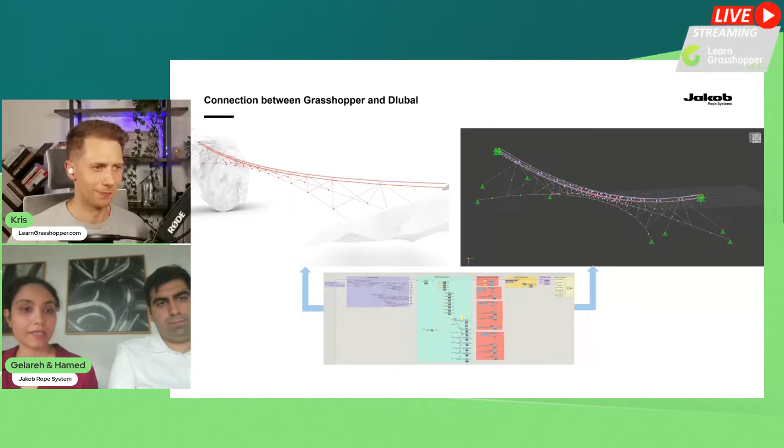About the company we work in, as you mentioned, it's called Jakob Rope, and it's located in a beautiful area close to Bern. The manufacturing company is located in Saigon in Vietnam. And Jakob Rope's expertise is in manufacturing ropes and webnet.

About myself, I got my bachelor's degree in architecture from Iran, and then I got my master's degree in iTech from University of Stuttgart in Germany. I joined Jakob since 2022, and my responsibilities now include doing computational design and developing parametric workflows for the projects that really add value. Also recently, I have been focusing on doing life cycle assessment and environmental product declarations to get certificates for Jakob's products.

We work on different projects, mainly developing parametric workflows. With this parametric workflow, we can automatically change the geometry to meet the structural needs and also to meet customers' wishes. This workflow also helps us create super detailed models very fast that can change according to any upcoming changes, so it has really made our work more efficient.

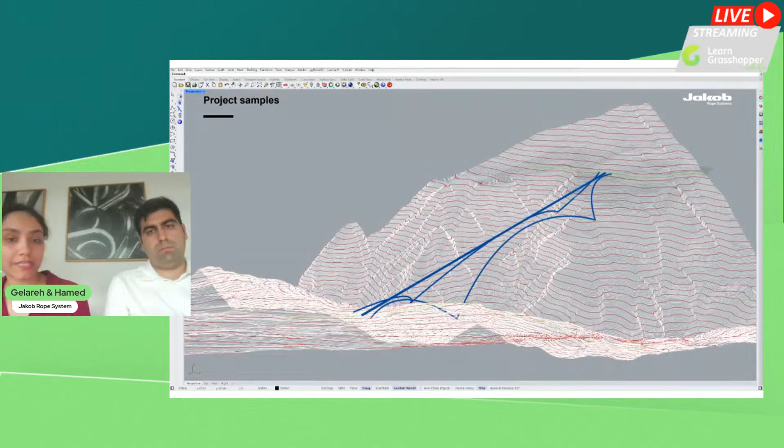When I say developing the workflow, it's not just about the geometry itself. At the earlier stage of design, it can help us locate the appropriate position of the structure. For example, given this length and span, where should we locate it so that the wind cables and foundations have the least distance from the topography. So at the earliest stage of design, it can also help make your work better and more efficient.

I'd like to add one more thing to the previous slide. It's really cool that you involved Grasshopper so early on, not just for the final design, but even for finding the best way to go with the bridge. Have you used any software to optimize the position of the bridge? Because I saw these colorful lines - if you can explain what they mean on the screen?

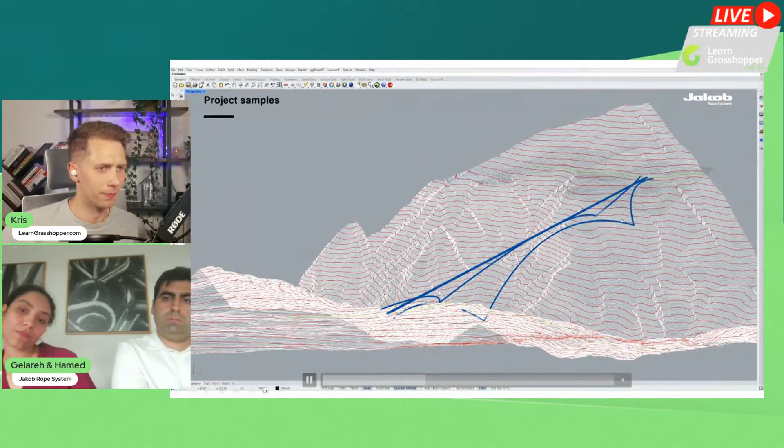For this one, we didn't use any optimization process. It was a simple calculation - we knew the distance and length of the bridge, and we knew at which elevation we should put the structure. But as you can see when I play it, there's a wide range of options for where you can decide to put the bridge. So we took the distances from the lower points of our wind cables, which were the position of the abutments and foundations, to minimize the distance. We had a range of numbers from which we could select the best position. This range shows it getting greener where you need less excavation to put the cables and locate the abutment.

Really great, and as you said, it's not necessary to use complex optimization - you can just make it simple, and for sure it works great. Okay, thank you. Of course.

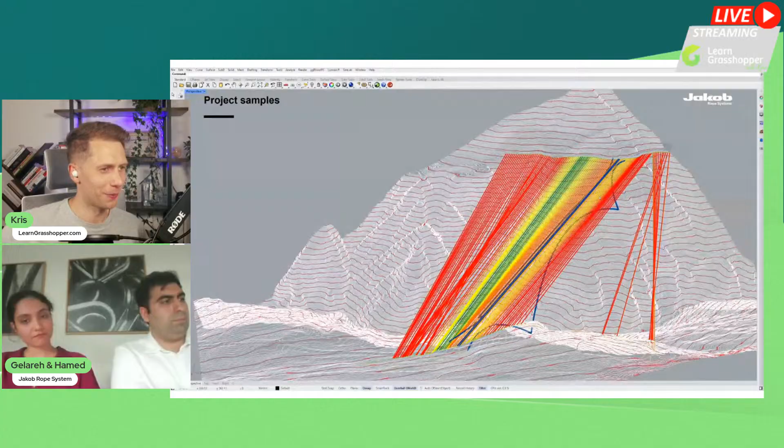Hello everyone, I'm Hamed. I also got my bachelor degree in architecture from Iran, and later studied ITech at the University of Stuttgart. I joined Jakob in 2023, and my work mainly focused on developing parametric tools and automation in the design and fabrication process. I also developed tools for repetitive and time-consuming processes for in-house use to make tasks more efficient.

In this project, we also developed a workflow that uses the webnet as an active structural element. This workflow enables us to position the bridge in any given topography and generate system lines, structural analysis, and get a bill of quantity, production plan, or any other documentation needed instantly. To demonstrate this workflow, it was used in designing a suspended bridge in Chur, Switzerland. I have to mention that this Friday we are going for the opening of this bridge to see it in person.

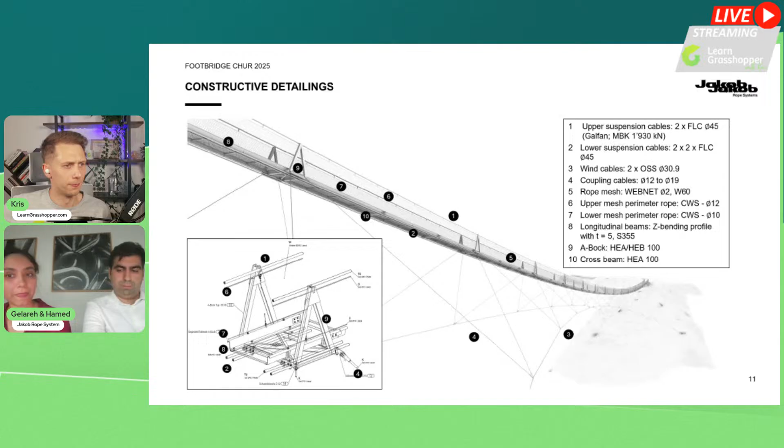Because it's really a beautiful bridge, and we visited it in winter, I would like to show a video of the bridge so you can get a better view of it. The surroundings are just amazing, so it's so beautiful to design bridges in this area.

So what software have you been using? You said Grasshopper and Dlubal for calculation, and what else? We also use Inventor for detailed design. Yeah, in the company, people also use Inventor for detailing.

And we can see on the screen the preloading, tested with the calculations. So for those who never seen bridge design, in most cases you have to test it out. Here, they've been using water tanks to test if the response of the bridge is similar with the calculation. And this looks amazing with these waterfalls going from the bridge.

I will move to the next slide.

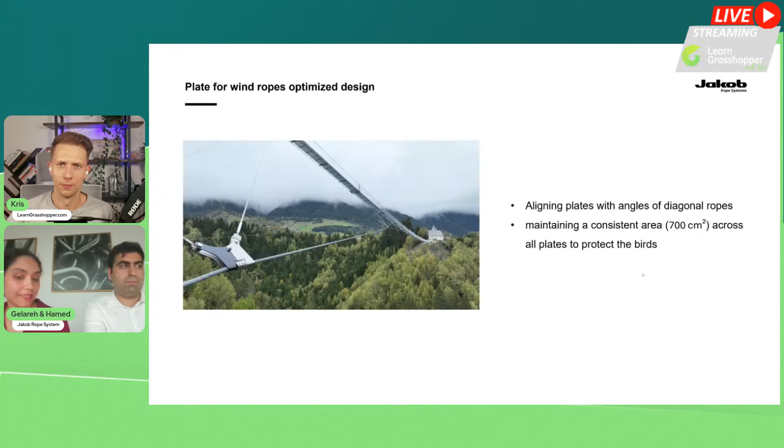And this is how we approached it. We explored a wide range of design options with different fillet sizes and different directions, but we chose the ones that could meet this criteria of consistent area and also be aligned with the cables. Because each cable at the intersection has its own different angle.

So every single plate was different, right? Every single one. There was no scenario where plates were similar, no—just because the bridge is mirrored. Of course, the ones which are mirrored are similar.

To tell about the workflow of this project, the model is generated using Rhino and Grasshopper, and structural features are assigned to the geometry, like the section and the material. This can also be defined in Dlubal, of course.

Then the generated model is taken to Dlubal software, it's analyzed, and the optimized result is brought back to Grasshopper. Rhino and Grasshopper also help to do super high-level details—the basic geometry was used by the steel supplier for creating 3D models applicable for construction.

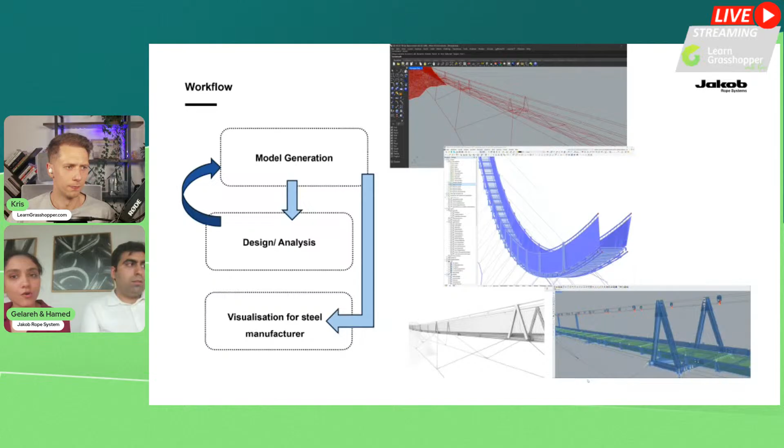And now I will hand over to Hamed to open the script. Yeah, so now we will go to the live presentation, so we will see the Grasshopper in action. Hope nothing will crash.

I also hope so. But I wanted to start with a very simple example to show how we can define the geometry itself, then assign the structural property to our geometry, how we can export this structure to Dlubal, run the simulation, and bring the result back again to Grasshopper. So we'll have the full loop in Grasshopper in case you want to run any optimization processes or other uses. After that, Gelareh will

show you the Grasshopper file for the actual bridge, because that one is a little bit big. So we'll just start by learning with a simple truss. But before that, I also want to mention that we are able to import a structure with all the structural properties into Grasshopper. We can simply use the RFEM 6 import component and run these components. Of course, I also have the model opened in my RFEM, so they can make a connection.

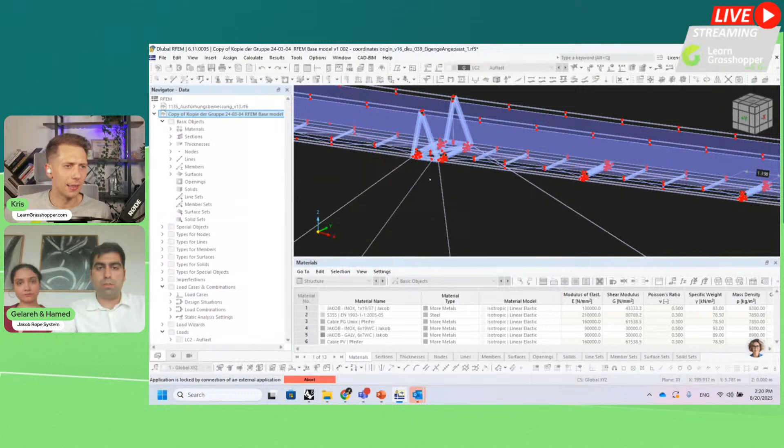It uses a web server to send and receive data between these two softwares, acting as a bridge. Our model is a little bit big, so it takes time to import everything. Is the link between Dlubal and Grasshopper available for free? Yes—in RFEM 6 it comes with the Dlubal licenses. In RFEM 5 it was a separate license.

So actually, you don't have to model everything from scratch. You can also import into Grasshopper a model already built manually in Dlubal, and then make all the modifications, right?

Exactly. I'll mention it later in the Grasshopper file, but for some options, like design situation or load cases, we're not changing them every time we want to run the simulation. So we can define these properties once, save it as a template, and reuse it again—assigning this property to our load members again and again, just defining it once in Dlubal.

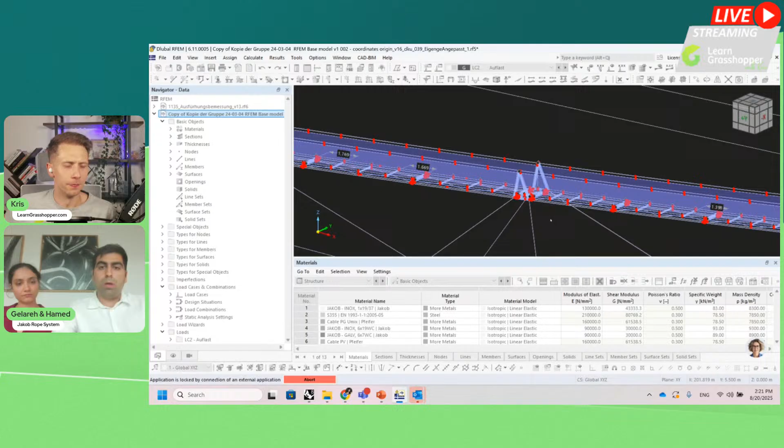Everything is modeled as beam elements here. We also have some cables, so basically it's a model with cables and beams.

I can show you the model a bit while it takes time to import. And here you can also see on the bottom it's talking to the Grasshopper client.

Maybe you can tell a little bit what elements were created with Grasshopper and what's been created with just Dlubal. Actually, in this model, everything is modeled in Grasshopper, created geometrically, but for the design situation, load cases, load combinations, these properties were defined in Dlubal.

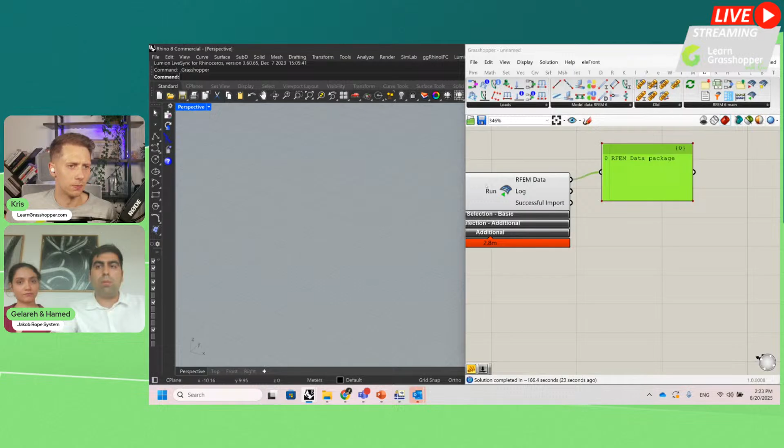Now we imported our model, but it's like a data package, so we cannot do anything with it. We need to somehow deconstruct it, split it down to the different elements, so we can use the component called data component.

For example, for the material, we can use the material component from Grasshopper, but here we should change the mode of the component from assembly to extract. So here we can see the name of the material we used in our previous model. We can also see the index of those materials and any other options they have. Or for example, I can also import the members.

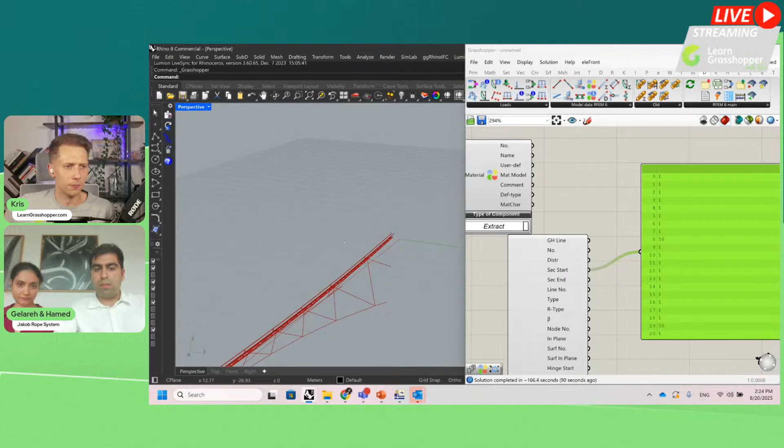So we can see the cross section. Of course, we also need, these are the index of the cross section we defined before, but we can see them here, and these are the Grasshopper lines we have.

Actually, you can extract all the information about materials and cross-sections from the active window. We have to have the window active from Dlubal, and the link is just created as you drop one component, and then you can extract one by one.

Exactly. And if you just need to import a specific property, like just the material, and your Dlubal model is huge like this one, and you don't want to wait several minutes to import or export the whole model, you can filter your information here.

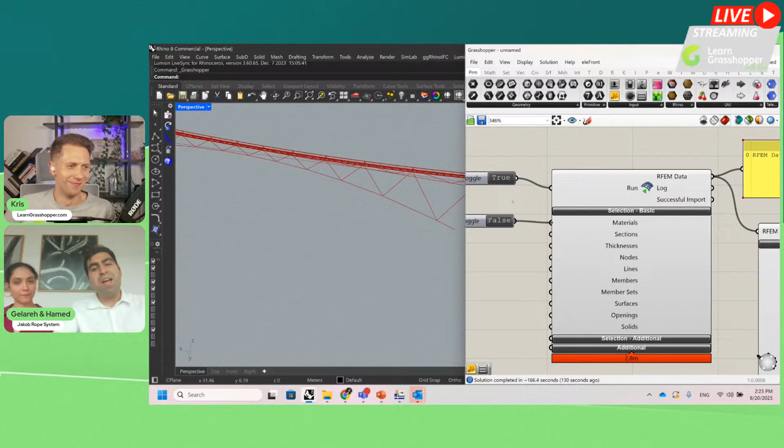For example, I can make this one true, so it will only import the material for myself, from Dlubal. So you can limit what you select and filter it out.

Exactly, yes. So let's start with our simple truss. I can start with a simple horizontal line, and give it a length, for instance, 10 meters.

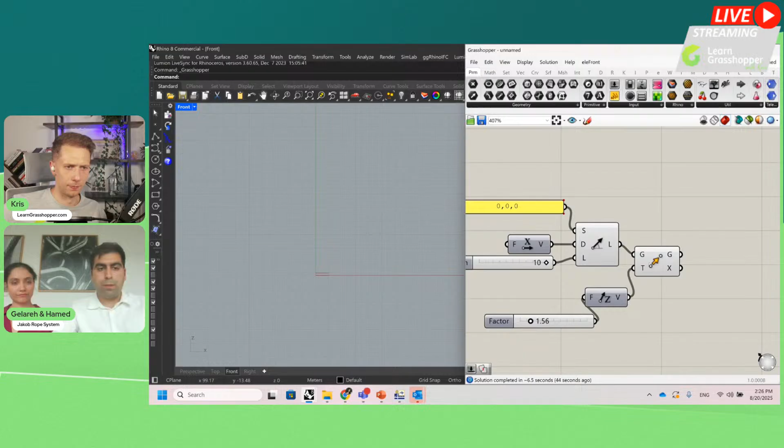I can move this line in the Z direction, I don't know, 1.5 something in the Z direction, to create the upper part of my truss.

I can also divide these two lines to be able to draw the diagonal and vertical elements. So now, first of all, I need to draw my horizontal lines in a bridge. I prefer, although I have a single line for this horizontal line, to make it like a polyline, so segmented.

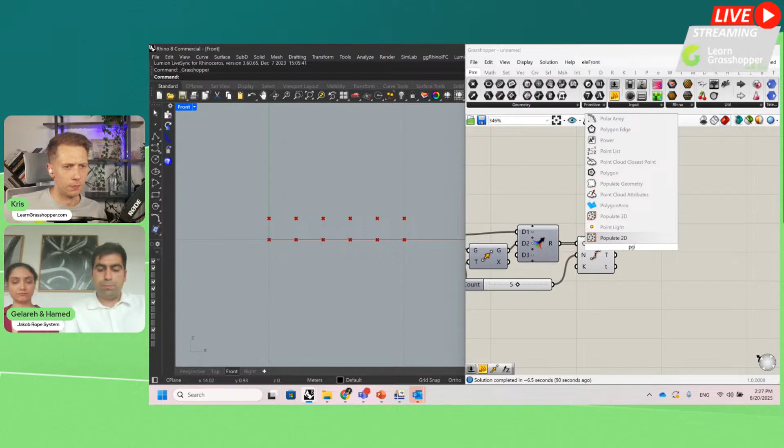Sometimes at this intersection point, Dlubal automatically detects the intersection and adds a point on it, but sometimes it misses this intersection point, and structurally our structure is not connected. So it's better to create it from scratch as a separated segmented line.

So I can create a polyline out of it. I can also flip my data to be able to have the vertical ones.

For the diagonal ones, I can remove these points on top and bottom one after each other. So here I can just keep this one, but I also need - okay, so for the top line and for the bottom line I will keep this, and for the top line I can change the pattern.

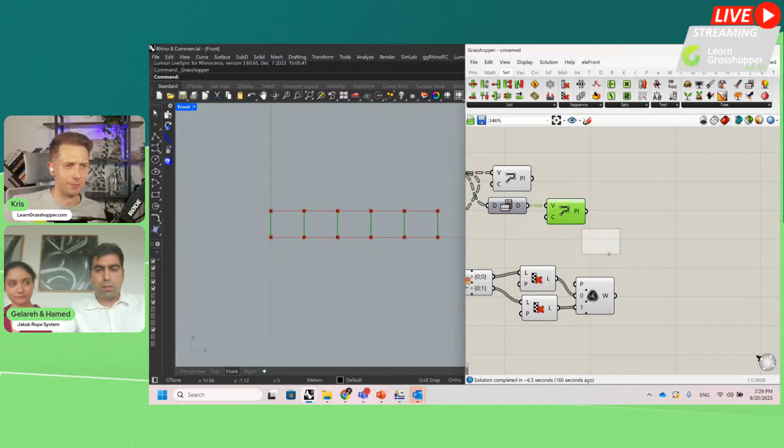And we can merge these two lists together and create the diagonal lines.

It's also much better, advisable, if we explode these polylines into segments. So we can explode them and also flatten all the output geometry.

Okay, so now we have everything we want. We also need to create our structural elements with different cross sections as a separate container.

So I prefer to use Telepathy. It helps me a lot to organize the data here. I can also recommend Telepathy, it's a really great plugin to define variables and avoid making that much mess in the script.

Exactly, and you will see in a model like this decent bridge model, which is huge, you cannot really keep track of data without having a tool like this.

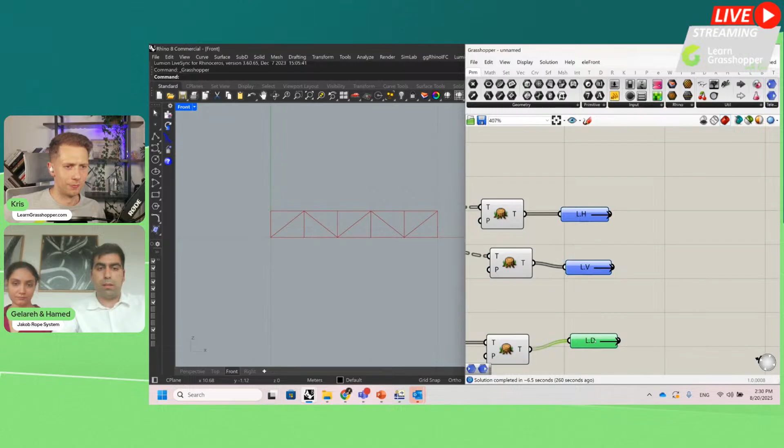So I will add this L for having my lines, and then the name of the lines after that - horizontal lines, vertical lines, and diagonals. So now I have all the geometry I needed.

I also need the two points for my support points, for the supports. Create them and add them here.

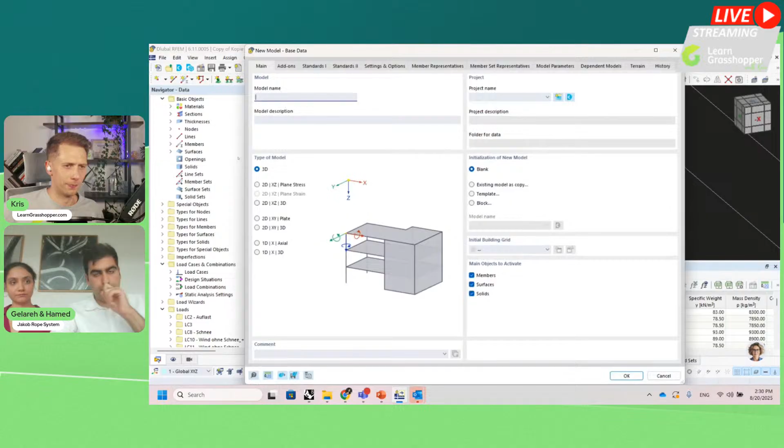Now we can start creating the model, or all the properties we need for Dlubal to work properly. So I can create a new file, name it test, for instance. Okay, so in Data Navigator parts, we can see what type of properties we have in our Dlubal model, and we can use this list also as a checklist to define everything based on this.

So we'll start with the material. For each object in Dlubal, we need a specific index. So I can give this index manually, as we only have probably one material. We also need a name of the material, and this name should match exactly the material we have in the Dlubal library. So we have 2 ways to get this exact name from Dlubal.

Either we can create a new material and search the name from this list, or we can also go to the CAD/BIM tab and open the conversion table. Here we are also able to search for the material. But one point I forgot to tell: before doing that, we have to go to program options. We need to turn on some options first. For communicating between Grasshopper and Dlubal, we have to check the web server, to be able to bridge the data between the two software.

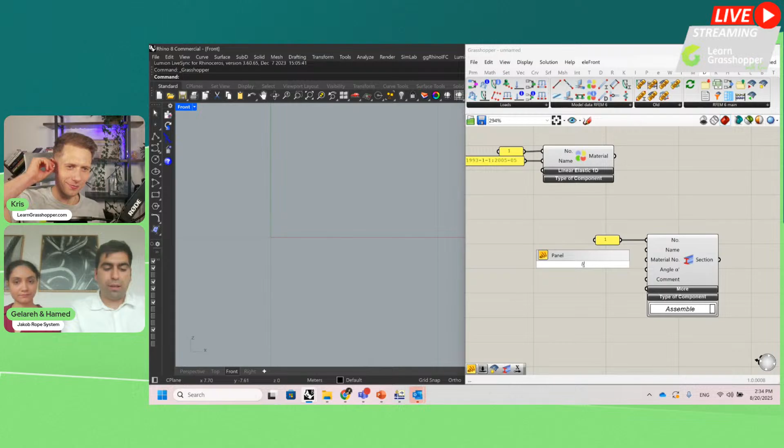And for the name, I can just give it a cross section, any cross section. It can be hard for Grasshopper users to start counting from 1. If your whole life you've been counting from 0, now you have to change again.

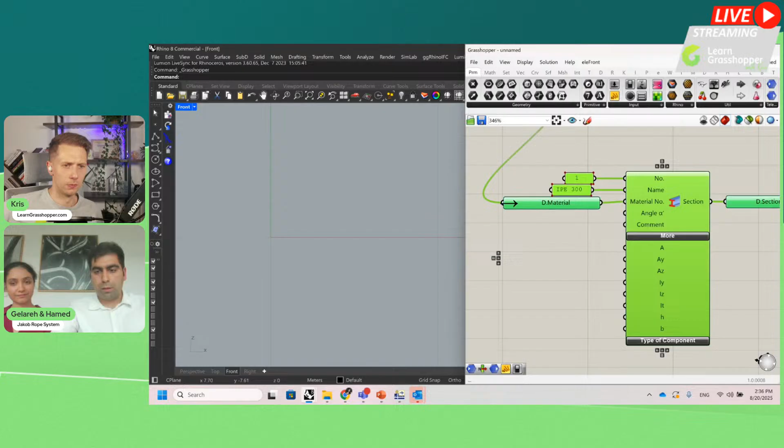And again, to keep the data structure also in the Dlubal section, we name this data Dlubal.material. And I can change this name to section 1. So I have this cross section created. Of course, we have all the options as we have in the Dlubal software. These are optional properties. If you want to define them, we can define them here, or otherwise just take the default values from Dlubal.

For the next one, we can also change these. We can use a different cross section for the other type of members that we have, and I can give it another name. So now we have defined the material and the cross section. We are ready to define our first member.

We need a Grasshopper line, so I can take this receiver just by right-clicking on this telepathy key. I have all the lines here. So I need my horizontal lines for these. I need to give each line a specific index, so I can get the length of this list. It's not given automatically? You have to always give it?

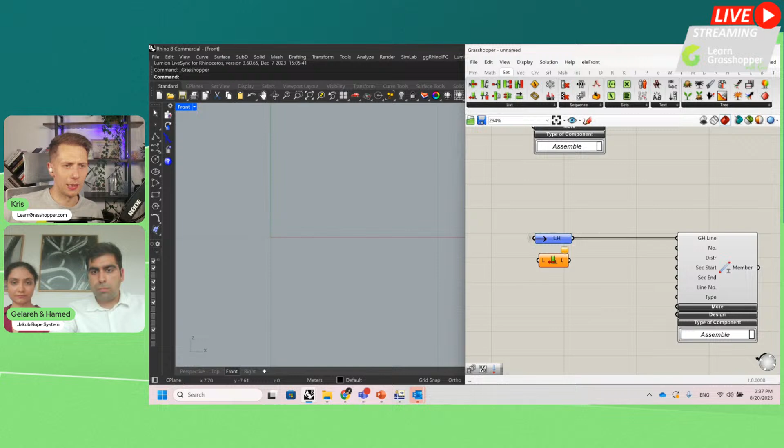Well, if we only have one member component, then it will get it automatically. But if you have several member components, and later on we want to use these members to define also our load members, it's much better to define it ourselves and have control on everything. Yeah. So you can use a series, and the important point is to start from 1. So we have our first lines.

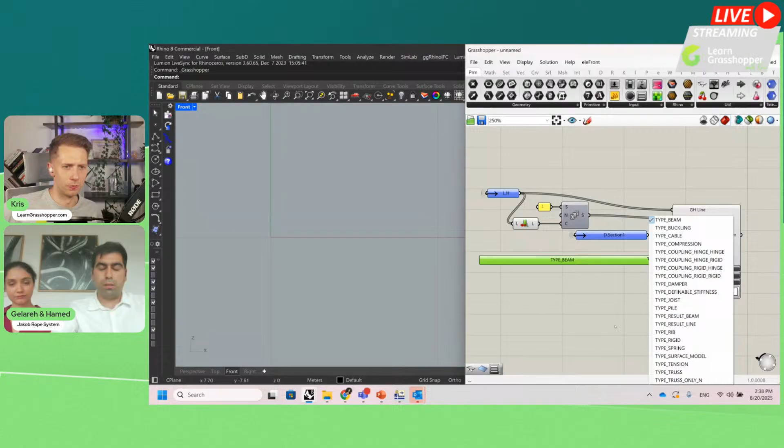We also need the cross section. Sorry. So Dlubal cross section 1. And the type of member we can also define, just by connecting a value list to this component here. Oh, nice. So it's automatically finding information from Dlubal. It will bring all the options that we have in Dlubal here. And set it as a beam. Okay.

It for the first one. For the second one, I can use the horizontal, the vertical elements. And for instance, I can also bring the diagonal ones. I can merge these two members together.

And again, we need a list. So how many lines do we have? And also we need the last index we used in the previous component, so the numbers are not overlapping. So we can get the last item that we used here, +1, because we're gonna start from one more, and in this component we can start it from the next index.

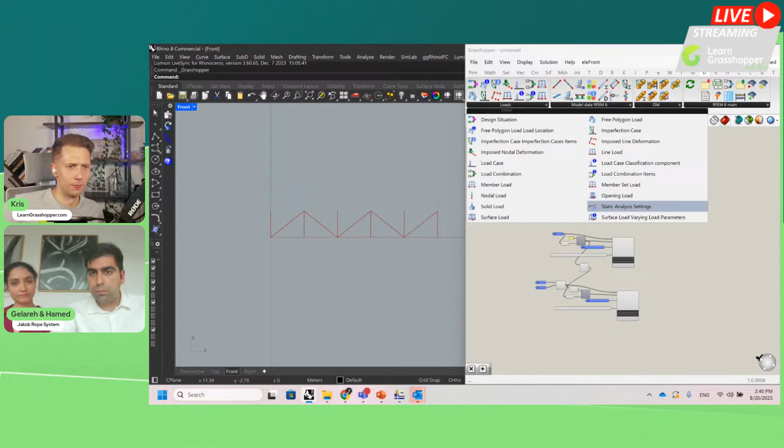And also, for this one, I want to use a different cross section, so I can just change my cross section to 2. So I will take the cross section from the second cross section component, and now we can create our support. So again, I need my lines. Or just the points. What do you need? Just the points for support? Yeah, exactly. These 2 points that I used.

Because I only have one component for defining the support, I can define it by myself, or it will automatically define it by itself. But I have to define the type of the support. So if it's rigid, I can use infinite, and 0 or any number between these two, if you have any specific number for it. So you can also define the support.

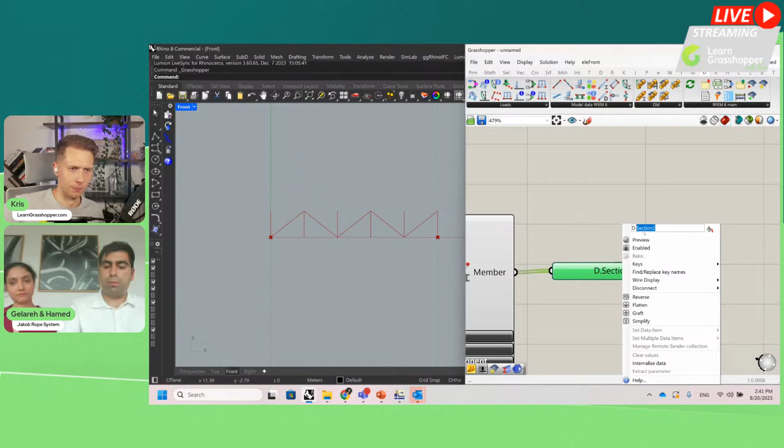I forgot to also create the data container for my members. One and member 2 and also, okay. So now we have defined our supports, we have defined our members. We can move forward and define our design situation, because I want to export everything from Grasshopper, and I'm going to run it also from Grasshopper, so I have to define everything here by myself. But as I said, we can just define these properties in Dlubal and just give it the index, and it also works perfectly.

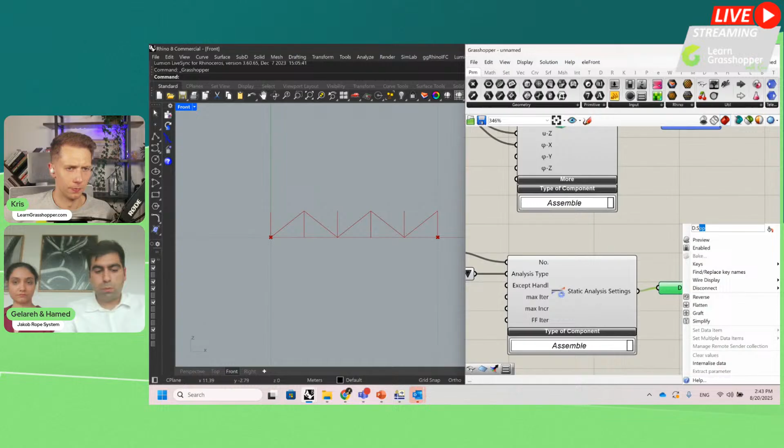So again, index and a value list for the design situation type. And we also have to export it. We can give it a name like this. Okay. What else? Now I can define my load cases.

So the loads, as a dead load or other loads, can you also define them in Grasshopper, like points or lines, or how to get the dead loads of the weight of the elements? Yeah. Of course, this is not my first expertise. I just asked this information mainly from the structural engineers.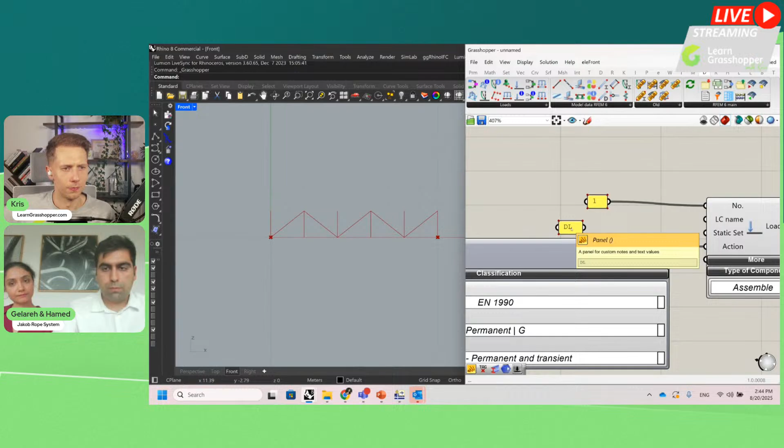But so we can use the action category. We need the index, and we also need a name. Should be enough. And for the static analysis, we can also take it from here.

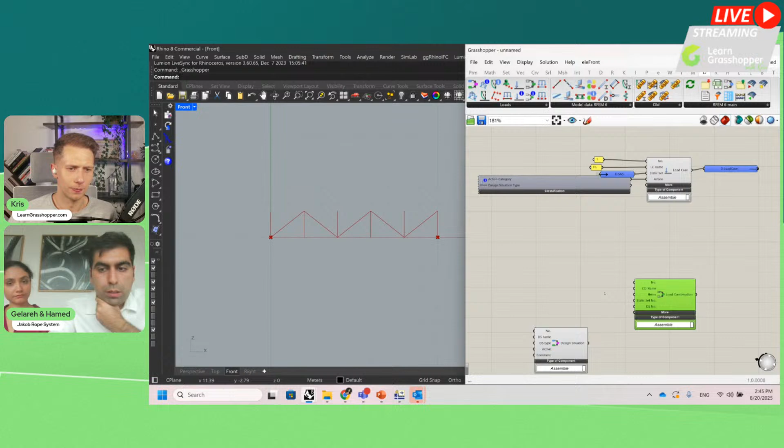Okay. Also, we need load combination. We need the design situation components here. So for the load combination, for the design situation component, we also need the index. We can also take this one from here. Design situation, and I can connect the static analysis, the thing that we created before, to the load combination. For the item, we can just give it a simple factor 1 and then a simple index. It should be enough, and also an index for our load combination.

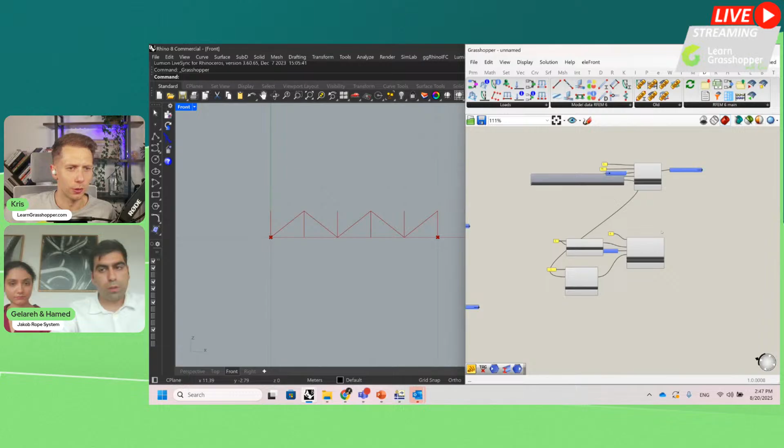It's also great that the terminology, the names are actually the same as in Dlubal. So for Dlubal users, it's not kind of black magic, all the names are the same. And the icons, I think, are quite similar, right? All the icons. Yeah. So maybe for non-Dlubal users it can be too many components the first time, but for those who have seen Dlubal before and used it, this should be much easier to understand.

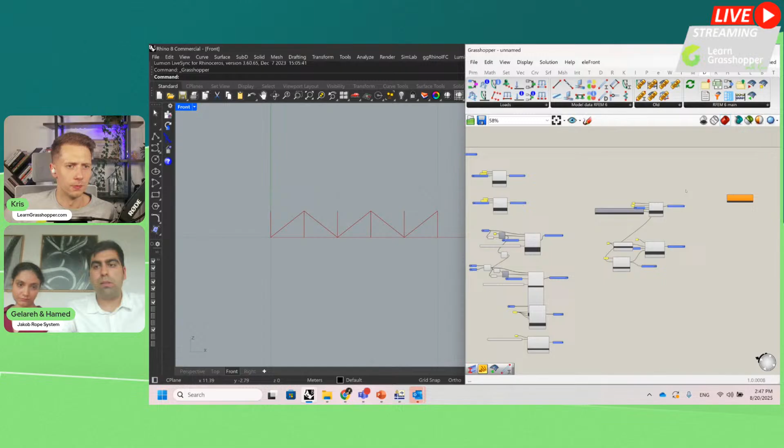Okay, so I think we have defined everything that we want, and now we are ready to export it to RFEM and see if we can run the simulation also. So I can just bring this component, the RFEM6 export component. I have to connect everything I have created before to this component. So now that's the time to use the power of this telepathy. So I can say D star, and it will connect all the containers related to Dlubal for me.

I like it. I like it. It's really nice, very nice presentation of the telepathy. So for those who never used it, you, Hamed, just confirmed that it's a great tool to use.

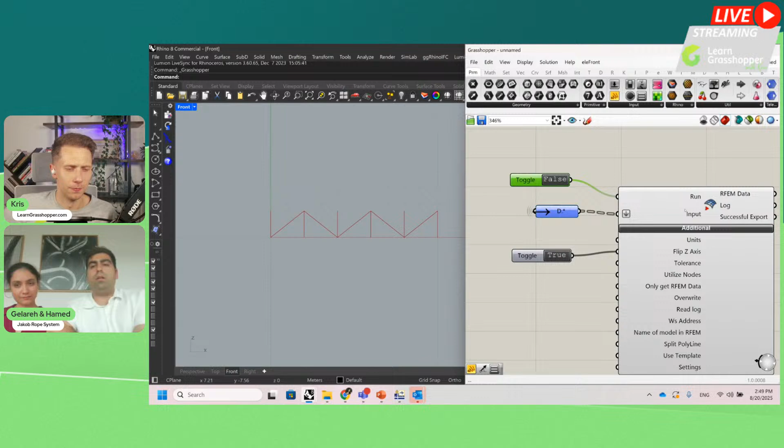It's like an input and run as a Boolean. Also, we have some options to modify here. As a default, my Z direction is flipped compared to Rhino's. If I want, I can also change it to true. I can also run these components and see if I can successfully export the model. Nice. And so now we have exported the model with all the structural properties, but we wanna... Design situation type.

I should have. No worries, but we saw that it was exported. Maybe the numbers, it's the same, like it's just a one. No, I connect this component instead of one below. So instead of static analysis,

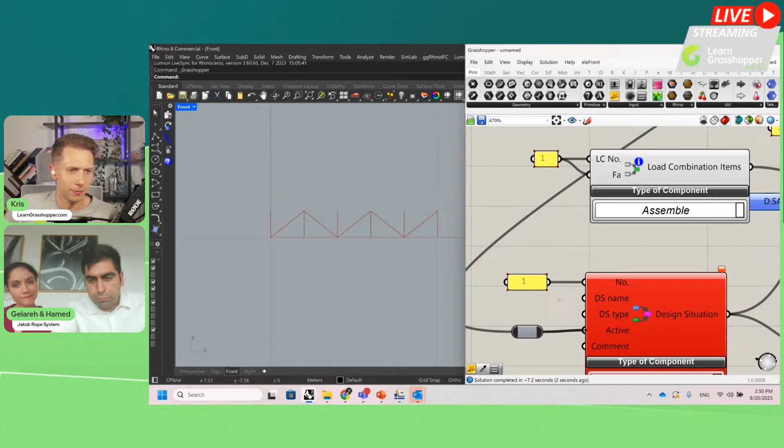By the way, in the meantime, we had a question. What is the full name of the plugin that connects RFEM with Grasshopper? What is it called? It's just Grasshopper Dlubal, or? I guess it's Dlubal itself. It will install by installing the... It's a Dlubal plugin. Yeah, it's called just Dlubal plugin. Perfect, thanks.

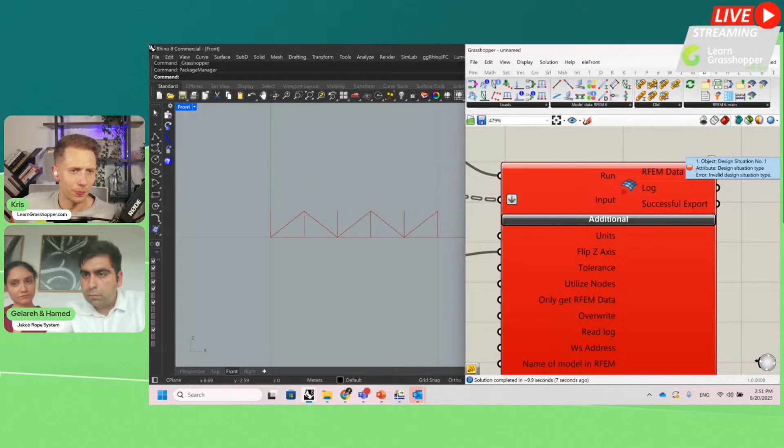So what we are changing, just a type of design situation? Design situation type. Let's see. And it's every time sending to Dlubal. That's why. So I think users will also see that computational design work is not always working. Sometimes it's changing colors to red, and you have to find it out. But luckily, Grasshopper gives hints about what can be wrong.

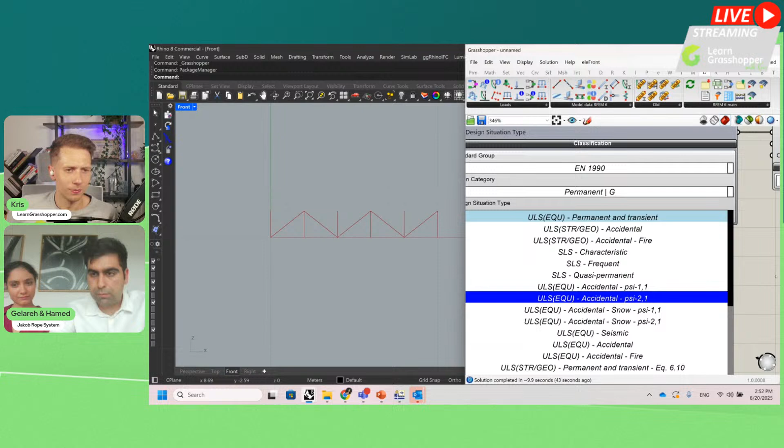Okay, because we also have to define. Oh, I think I found what I missed. So here we have to define our design situation type also, and I forgot to define it. So it looks like every single option and situation that is in Dlubal, you can also access from Grasshopper. You can extract every single piece of information, design case, design situation type, and action type category. That looks good, that there is not that much limitation.

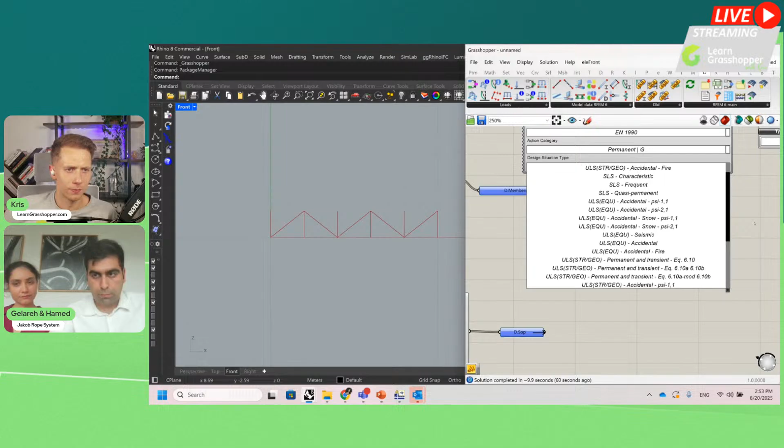So it's supposed to be like a permanent, or what you are looking for? If it's working, then. So you cannot choose from the list, or? Yeah, it's a little bit slow. So maybe this time I can try my luck. Most importantly, we got this exported, and voila, perfect. So you showed your amazing skills creating this script so fast, and now you also showed how fast you fix bugs. So well done. Thanks.

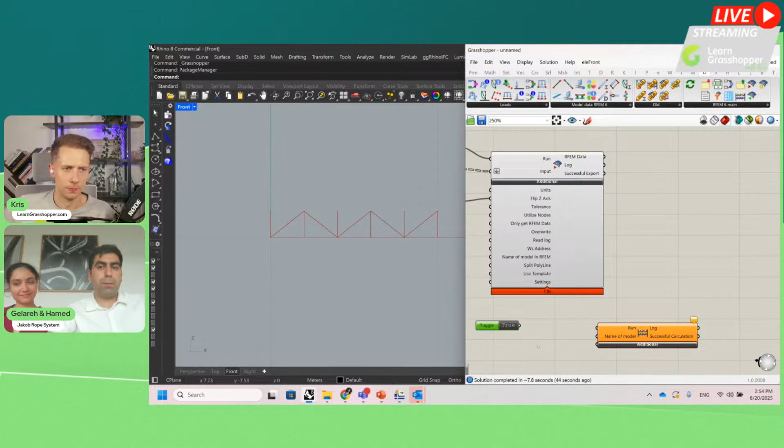So now we have exported the geometry and the properties to Dlubal. We want to run the simulation from Grasshopper, and we can do this using this component called the calculation component. We can run this either with the toggle, or we will get a Boolean from the output of the export component when it successfully exports the model. So you get the confirmation when it does the job completely, then you can run the simulation. You can feed this new component with the export component. Then here in Dlubal, it will run the calculation. You can see it also here on the bottom.

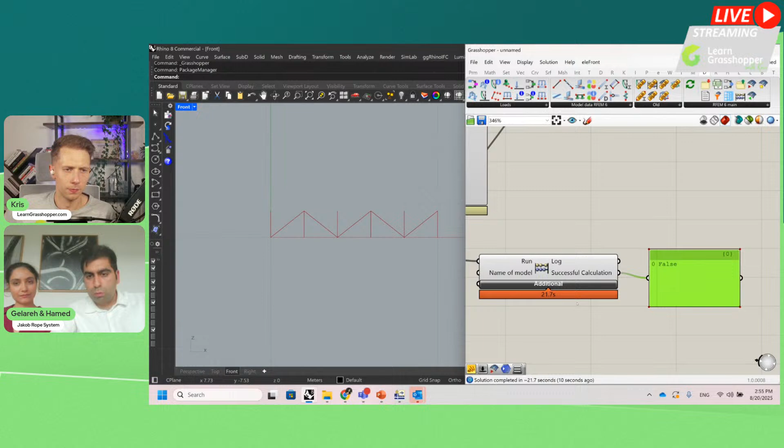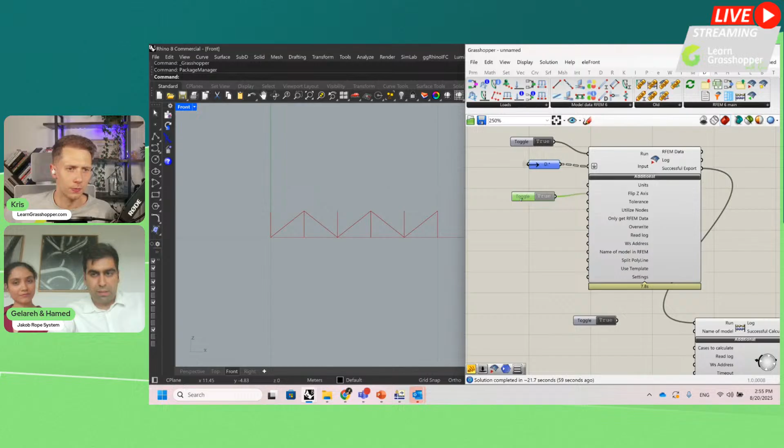And we will also get another, oops. Oh. So it's pointing at some of the nodes that are too close. The problem is I exported this model several times. Every time I hit this export button, it exported the new model, and they are overlapping with each other. To fix that, we have another option here, overwrite. All right. So we can erase everything we uploaded before.

So before it was finding lots of points next to each other, and a lot of duplicated structural elements. Yeah, you are sharing lots of good tips for users who are starting with Grasshopper and Dlubal, so they don't have to find it by themselves. For a beginner user, finding this kind of error might take a day, and for an experienced user like you, it's one second: okay, too many exported models. So now we have 63 elements, so that looks much better.

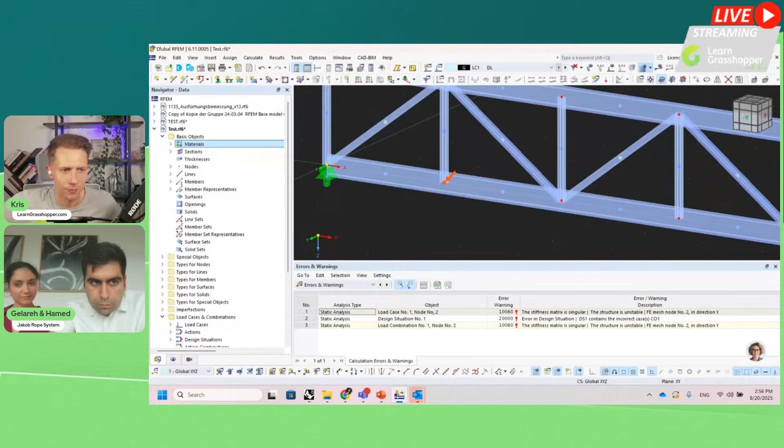We can create a new model. So it's just about creating a new model, and the link will be created again. That's also really nice that it's so fast that you can just switch from one script to another. Also, as you can see here, I have several models open in my Dlubal, and here it just takes the latest file I have opened, but if I want to communicate with a specific model in Dlubal, I can also specify the name of the model here. So I can choose which model I want to export my file to. So if you don't have a name, it will take the one currently open, right? Yes.

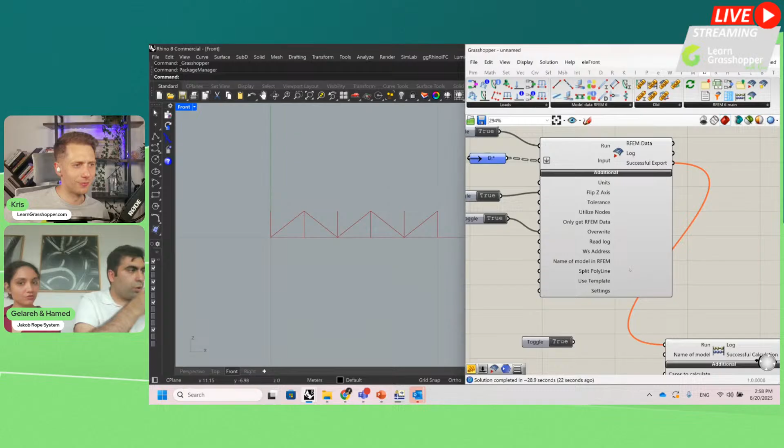Yes. People can have access to Grasshopper, obviously, but they don't use it as often as we use it. Yeah. But more and more people like to learn it, I think, because they see how it makes the process faster. Yeah. So you are for this hard work, and if someone faces the challenge that they don't want to model this manually, they come to you, and you make all this magic, right? Yeah, exactly.

And I also have to add about Hamed that he has been teaching Grasshopper in Iran since maybe 10 years ago. So now he's not teaching, but yeah, he also has the experience of teaching. That's good. Perfect. Nice to hear.

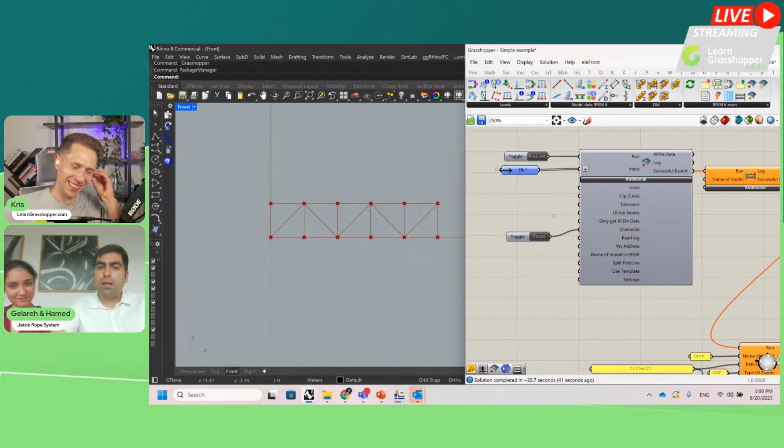Now I have to say I have to cheat a little bit because probably I did something wrong during the process and I cannot troubleshoot super fast during the live. No worries. You did everything perfectly. It's just Grasshopper doing something wrong. So to show the next step, I use the sample file I used before. So you can export the model, run the calculation, and I will also share this file with the users so they can also see and compare it with the live demo I had.

But after we run the calculation successfully, we can also use these components to export the results somewhere on our computer. So we have to say where we want to save this information, give it a name, give it a format, and then it will save everything for me. Of course, maybe you have to create the folder. I have to create it first. Okay.

And what is this component? How is it called? This component is called export result, I guess. On my first try, it didn't work properly because I had a different model name defined here, but now I have my results here. So everything is in the Excel-like CSV file with all the information about members, nodes. Exactly. For each node, we have the deformation in different orientations, X, Y, Z, and moment.

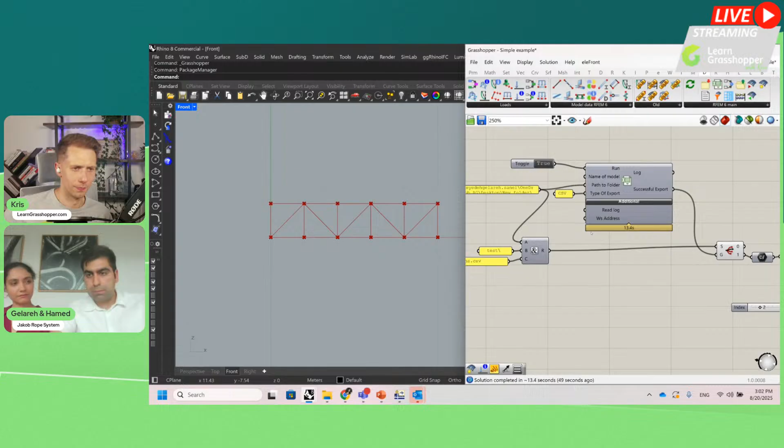And we can also read this CSV file in Grasshopper. So we can take the path. Of course, I changed the path so I manually navigate again to the new folder I just created, and then open this CSV file. I can parse the data in a way that separates the header and just extracts the information that I needed, like here.

And if we want, by using this result here, we have a complete loop. We created geometry, we exported, we ran the simulation, we have the result back. We can put it in an optimization algorithm and run it through the process. I guess that's all from my side. So I will hand it over to Gelareh for the Dlubal.

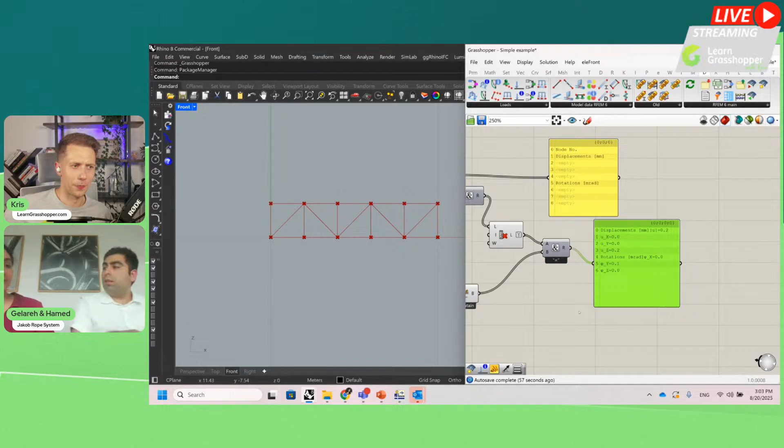We can also just say one thing: one of the biggest benefits is that if you change one of the inputs in this truss, everything will be updated and you don't have to build it from scratch. Sometimes people see this and say, okay, I can make the same in Dlubal. And it's true, you can actually do all the same, but when you make a change, you can update with just one click. Okay, but let's go to a more advanced example.

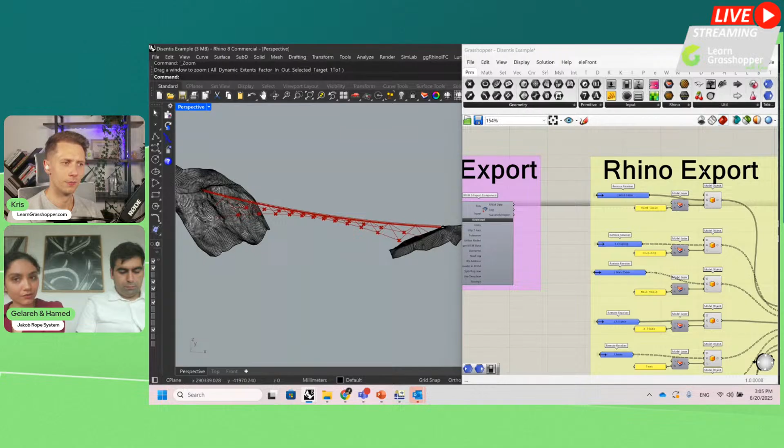Here is the bridge model, and to give an overview of the script, we have the geometry section. We have the RFEM model data that we have to assign to our geometries. We have the member loads, load cases, load combinations. I have a section for RFEM export and also for Rhino export, which is a good feature added to Rhino 8, so that you can bake everything with its layers, and each time you don't have to bake one by one and assign the names again from scratch.

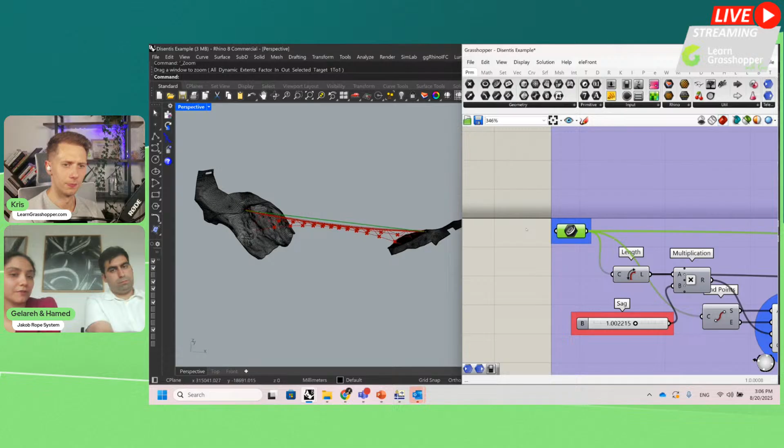Can you just say one more time what you are doing? So you are taking the geometry back again with the correct names, and you can just bake it in Rhino. Yes, exactly. To start with, we have the topography from the customer, and we started simply from a line. It's easier because everything is extended from it, so if you want to orient the whole structure and the topography, for example to a geolocation, we can use the same line for orientation and everything.

From my simple line, I use the catenary line, and this catenary line defines the deck of my bridge. It's better to use a catenary line instead of other curves like arches or NURBS curves, because later in Dlubal, when you do the form finding, it's going to produce a form which is closer to this shape, so it's better to start from a catenary line.

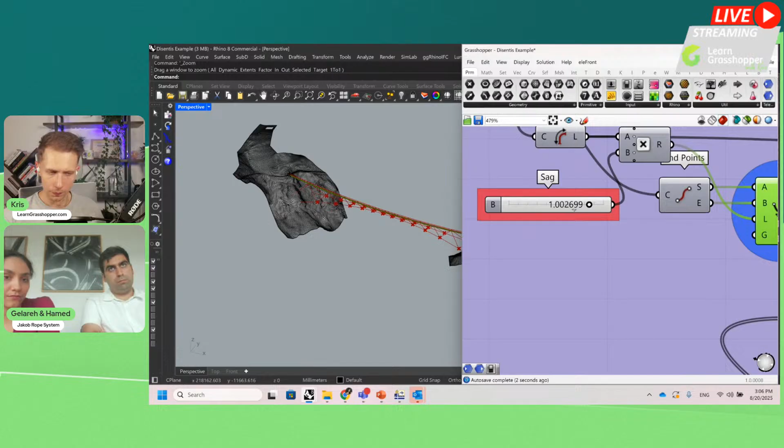As you can see, I can change the sag of my bridge. I have defined also my wind cables with the same catenary line. And this catenary line has the feature of the length. So with this length, I can again change the length of each line. I can change the rotation of my lines. So basically the point is that you can define as many parameters as you want to define. Also the height of my wind cables.

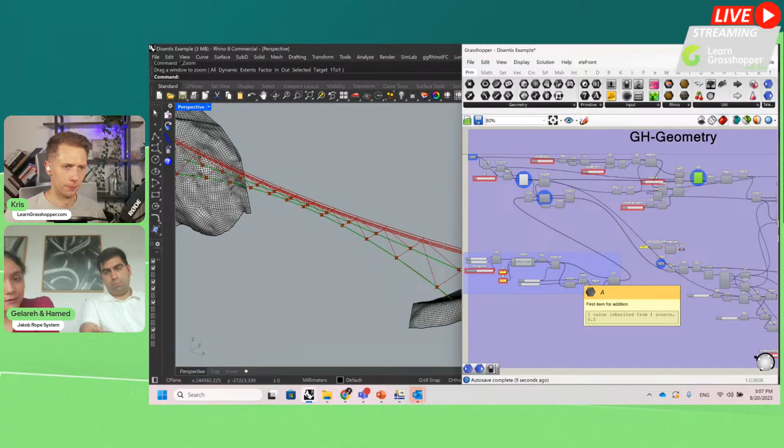For this bridge, for the segmentation and for defining the distances for splitting the elements, we had a formula that we have used for this part. Also, I have some elements which are called A-frames. So to define my A-frames, I started with a simple line, and I oriented it in the appropriate position for the bridge.

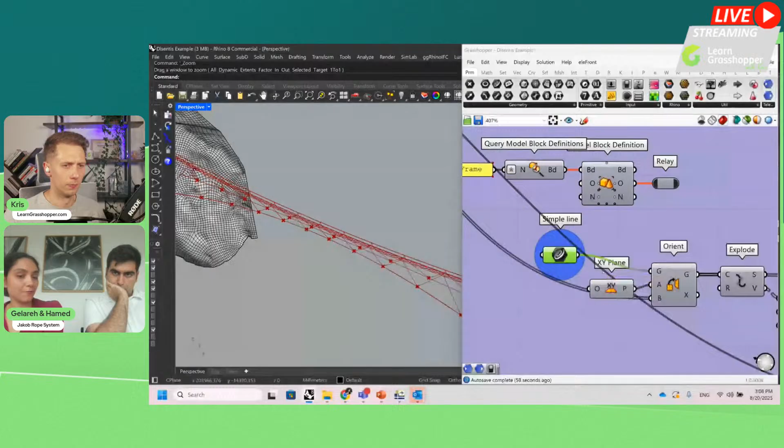And what we usually do is that we use blocks for super detailed models. For example, I have a sample here. I hope it's visible. So, for example, the cross-section is detailed, and we can change it very fast and easily because I had already defined a block model in my Rhino, and I had assigned all the points that I needed later for connecting my curves. So, as you see, I have the points.

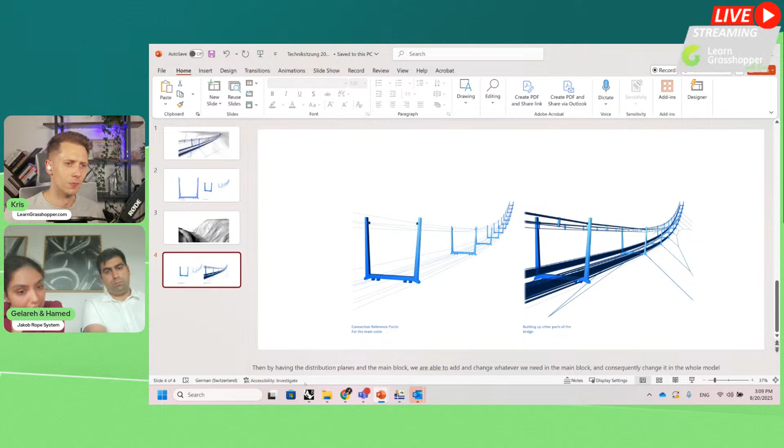And this block is oriented along my bridge, and if these are the segmentations, later I can use the same points I had defined in my block so that I can create my other curves. And in this way, everything will change automatically. So when you change your block, automatically your cables that you need later will also change. So this is a good feature also added. And you have to think about it beforehand. This is something really important, that before you design, you have to think about it.

So this is great. One more question from Carl Johan about the site topography data of the terrain. How do you receive it? I can see some mesh of the terrain. Have you received it from others, or was it photographed? Sometimes we receive the mesh itself, but sometimes there are only curves, and we generate the mesh from the curves that they have given us. The contour lines. Yeah, the contour lines.

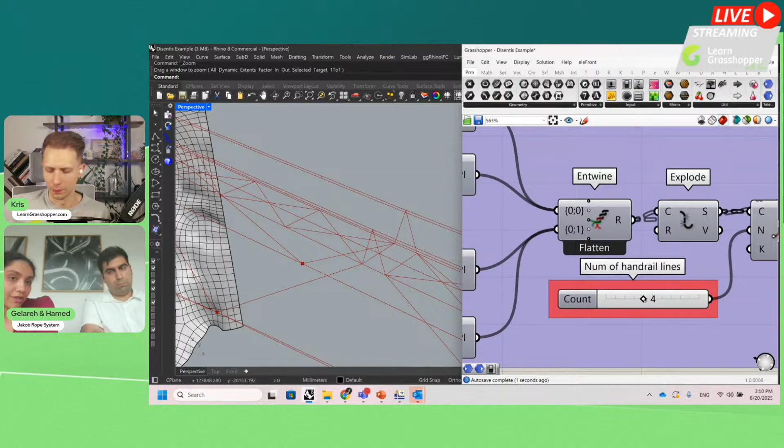Also, with other curves that I have, I can, for example, change the number of my cross beams. I also have some small connection details for my handrail cables. I can also change them. So you can define as many parameters as you need. And as Hamed mentioned, here, in a bigger model, using telepathy is the best option, I think, for managing your workflow. Whatever geometry I needed, I have here. Because they are the lines that I need later, the naming is like L.coupling cable, L.main cable, or L.A frame.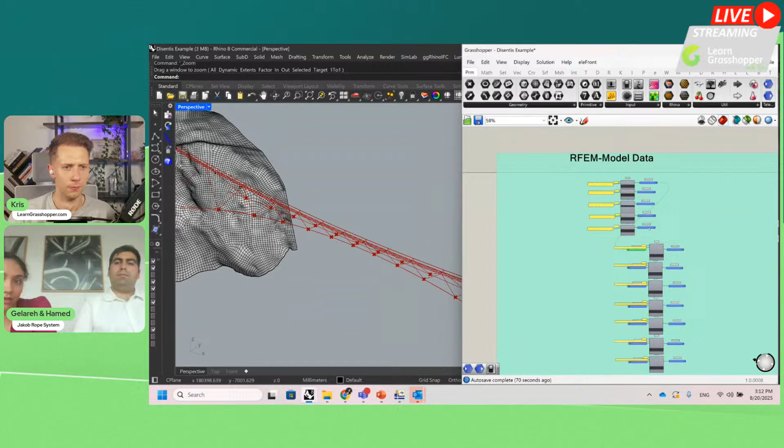So then we have defined all the sections. For each of them, again, we have the remote sender. And if you notice here, because I will later need them to export to my Dlubal export component, I have defined them as dl.material1 to 5, and in the sections, the naming starts with dl.section1, 2, 3, and it continues.

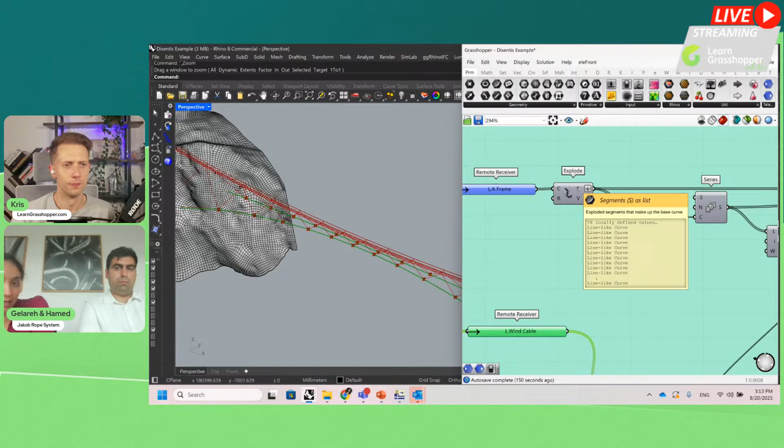After we have defined the materials and sections, it's time to define the members. So whatever members I needed to have the same section, I have them in one data container. For example, my A-frame lines are in one receiver. My wind cables are in one receiver. And as Hamed mentioned, we need to assign a unique ID to each of them. So here I have 78 lines for my A-frames. And we got the list length to create a series from 1 to 78 to assign it to the number for my member component. And the next one builds upon the previous one, so we get the last item of the previous series.

We add it to 1. I already had 78, plus it to 1, now I have 79. And the rest of the list starts from 79, and continues for as many lines as I have.

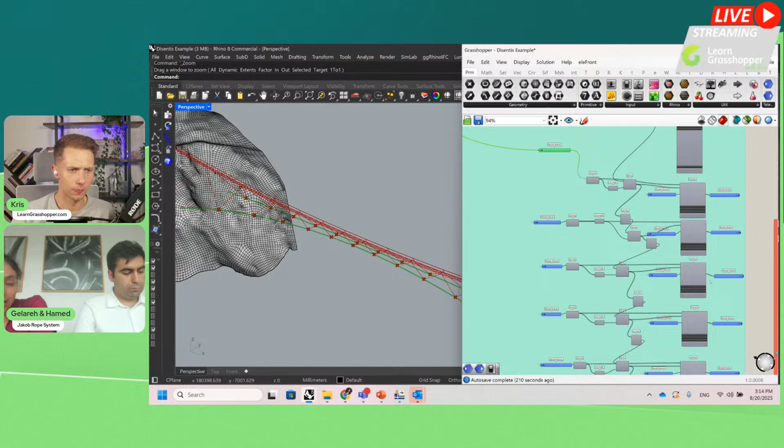So this is basically repeating for the whole member components, and for each of them we have the member sender.

I really like how you organize your script and data. It's really clean, not a spaghetti monster at all. It's really nicely organized. Well done.

Thank you. And after defining the support, section, material, and members, it's time to define the member load and load case.

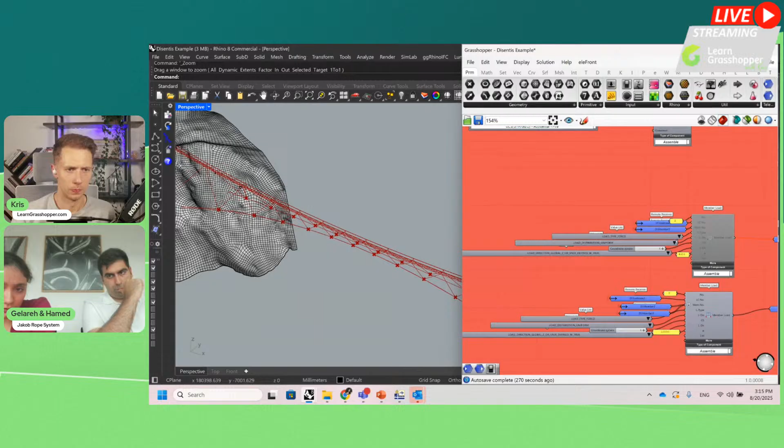For the member loads, we need load cases. So already before member loads, we have defined load cases. Here we have defined load case for dead load, load case for form finding, and also load case for snow plus wind with snow.

So each of them, like the previous components, gets its own number. They get their own load case, and I also got the member numbers from the members I had defined in the previous section. If you take a closer look at the scripts, it will be easier to find the connections yourself.

The load combination is also defined, like the example Hamed showed. And here we have the RFEM export.

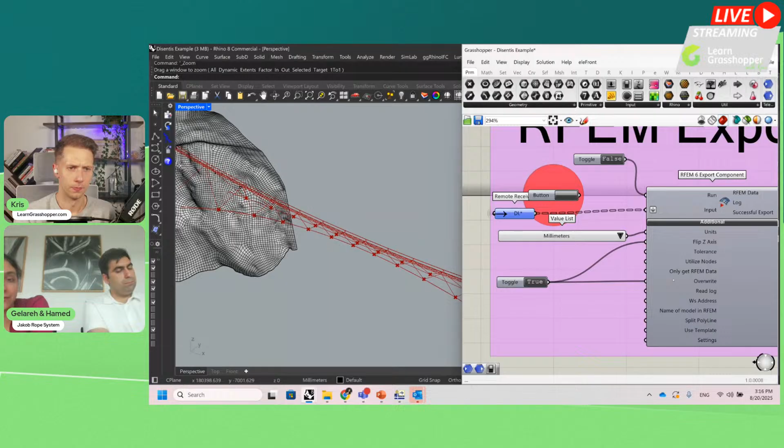Which I have again flipped the z-axis for. I can overwrite it, so each time if I change something, it overwrites the previous model.

And here is my Rhino export. I got all the lines that I had defined in the previous section. I have defined a layer, connected it to a model object, and finally we merge them all.

And here is the bake, also to see what it does. It was challenging for me before to bake them one by one, but now you can have everything the way you've defined in your workflow, clean and organized.

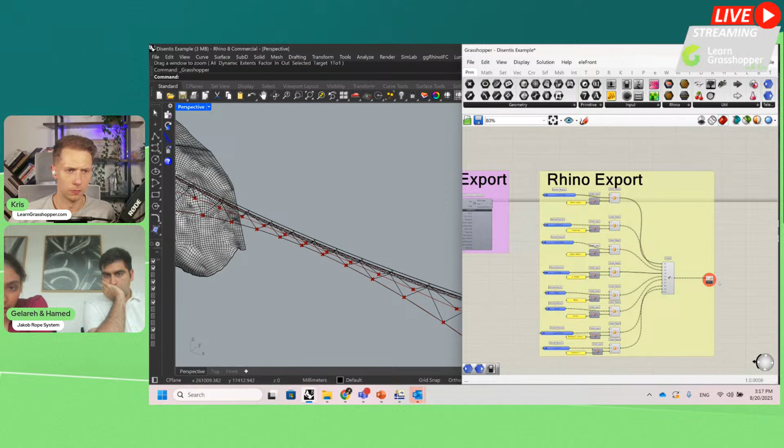Now I can also just check if Dlubal is open, with the new connection. That's also an important point - if it has any dialog window open in Dlubal, it cannot communicate. I hope now it can communicate.

Okay, so now we are trying to import everything and we'll see if it will work. By the way, in the meantime, we have some questions, so we can answer if that's okay for you.

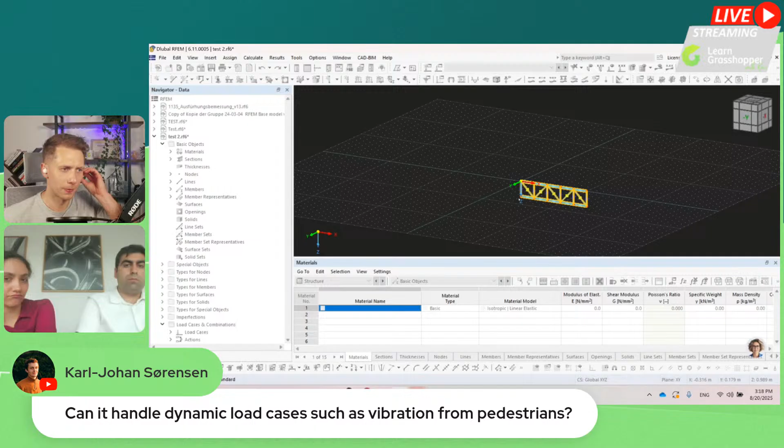From Karl-Johan: can it handle dynamic load cases such as vibration from pedestrians? Can you set up load cases for vibrations? We haven't tried it, we haven't studied the case, so actually I'm not sure.

But in general, every option we have... let me open this for you, sorry. Yes, we can also add dynamic load, defining it in Dlubal and from Grasshopper. Also, there are seismic loads, so you can define them. So yeah, I think you can do it.

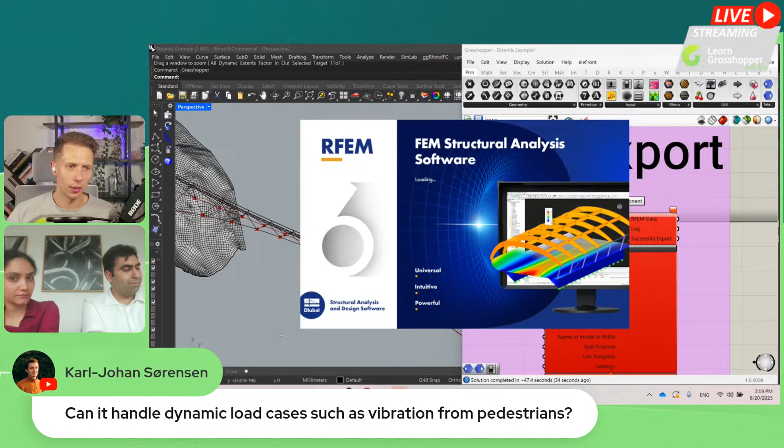And also, Karl asked how Dlubal compares to other code-compliant finite element analysis software in terms of Grasshopper integration and flexibility with complex geometry and large assemblies.

I can answer that one. Most of the finite element software used nowadays has this connection with Grasshopper, and of course some of the connections are better than others. But from what I've been testing, major companies doing a great job with Grasshopper integration include, of course, Dlubal.

That's what you're presenting today - it's sophisticated. FEM Design is also great for sure, Midas software, and Oasys GSA also does a great job.

The rest are still in development, but most of the software has the integration. I can also share the article I made about the list of Grasshopper integrations with structural software, so you can check that out.

I made it once. Okay, let's come back, and I can see that we can see our bridge. Actually, because I have several models open...

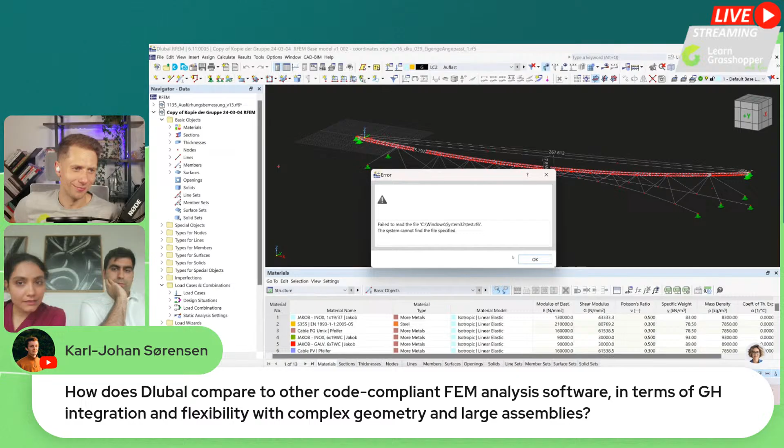Maybe it's too many test names of the files. Crashed, so... yeah, joy.

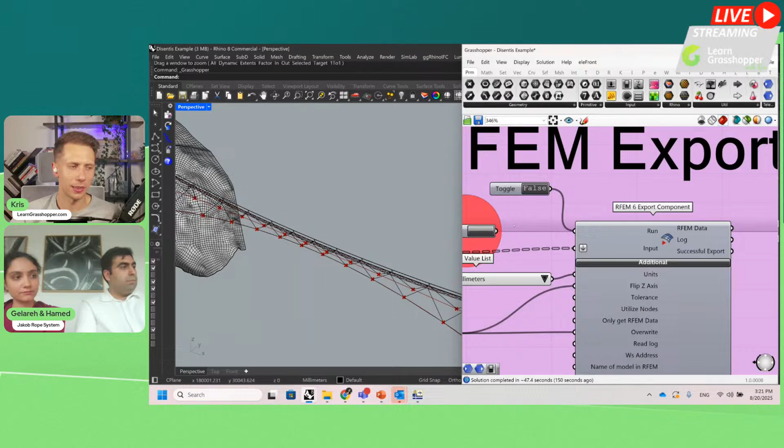In the meantime, if you have any more questions from the audience, we'll be happy to answer. Are you, Hamed and Gelareh, using any other software than Dlubal, or also other software for finite element analysis? No, we have tried Karamba also.

The problem with Dlubal is this communication takes a little bit of a long time, so it's a bit hard to run optimization because for each iteration we have to wait for a couple of minutes. But Karamba, because it does the calculation within Grasshopper, is a little bit faster, so for those types of jobs I prefer to work with it.

I didn't mention Karamba because the question was about integration outside Grasshopper. Karamba is like a native software that works inside Grasshopper for finite element analysis, and also works great.

Do we have some trouble with exporting that one? Yeah, I wanted to say outside of Grasshopper, the company only uses Dlubal for FEM analysis.

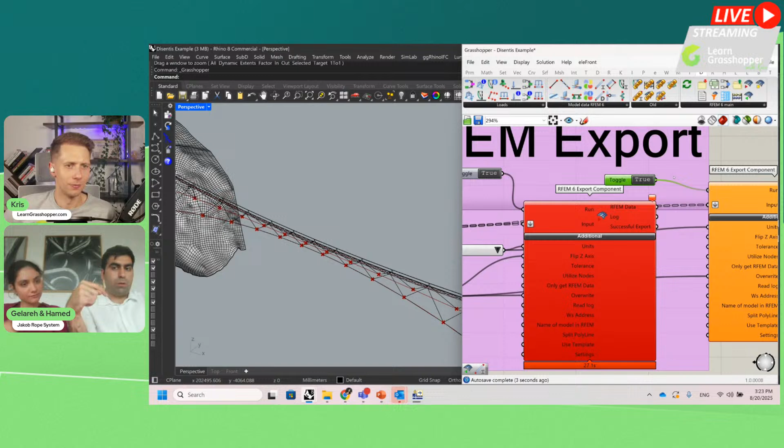So, are you trying to connect with the new component? It says it's actively crashed, so now it cannot connect, like make a link by using web server to the Dlubal again. Ideally, I have to close Rhino and Dlubal and start it again. But yes, now it works.

Okay, now we have the bridge here. It's of course flipped. That looks good anyway.

So you have defined all the supports and all the cables, all the beams. Great, nice.

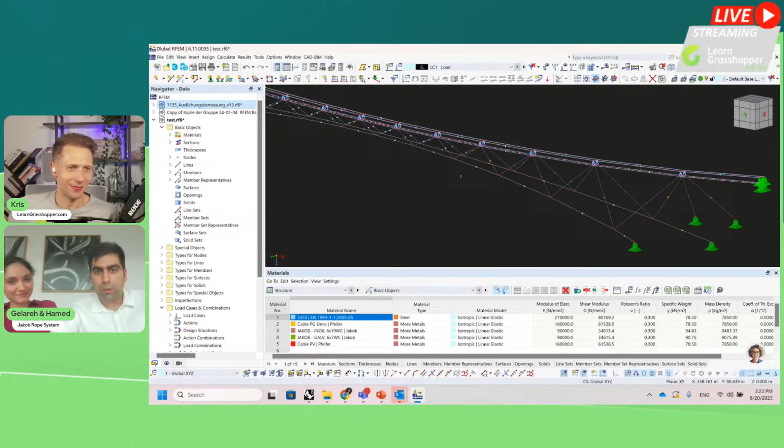Now you can see it corrected, because we have assigned it several times. No, but now the direction again, so now it's in a correct orientation. It looks good, you can see it.

Perfect. So everyone can see this beauty in the real world. And my question I have also...

Because this project was done a year ago, do you see any chance to reuse this script on other projects? Is there anything, maybe parts of the script, ideally maybe use the whole script? Is it even possible at your work, or do you have to create from scratch?

Yeah, actually, even now that we have a new bridge, I almost use the same workflow, I just add to it or change some stuff. If it's super similar, of course it needs minor changes, but in general there are some main components and parts that I always use the same.

And yeah, now we are going to have a new bridge, which is about 500 meters. So it will be super similar, and we will use the same script, probably with some changes. Nice, so it will be the biggest one you've designed so far, 500 meters?